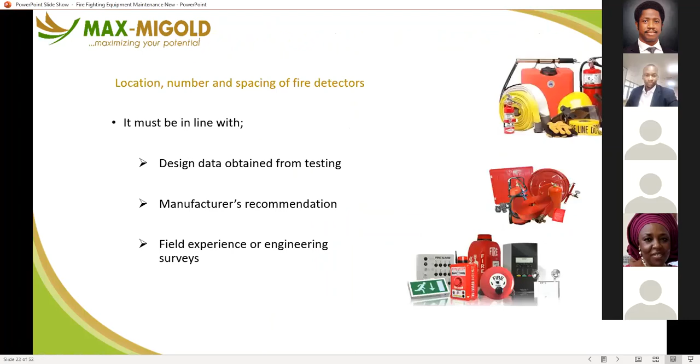And it could be passive, or can I expand this slide and see? No, you're going too fast. What's happening? Go to the very first slide. Let me. All right, so the very first slide. Yes, please. I was laying background, you don't worry. I'm just laying background for the past 10 minutes. Okay, yeah, is it all right? Just stop here. Yes, okay.

It's right there. So I want to lay emphasis around the passive and active. The fire system can be passive and can be active. By the word passive, we mean that we need somebody to actually go in there and activate it, for instance, our fire extinguisher.

Have you seen instances where the fire extinguisher even got burnt? Yes, because it is actually a passive system. It's a system, so when I say passive, something is waiting to be activated. It's a system that cannot operate itself, it needs help. It's handicapped, yeah, so it's disabled. So okay, don't let me use the word disabled, that will not sound right. So it's a system that needs someone, a human being, to actually go in there and activate it.

Whereas the active system is a system that senses the presence of either smoke, fire, or abnormal heat condition, and then discharges to work. Next slide, please.

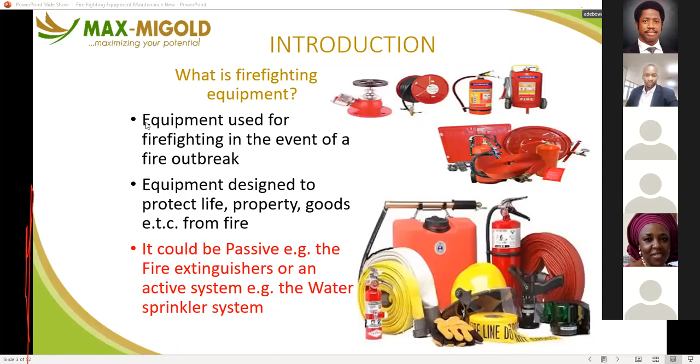Am I audible? Next slide, Lamide. Yes sir, or Baraka, next slide please. It doesn't move here, is it my network? Yes, I think it's the network, sir. Okay, yes, okay, just tell me the header. All right, okay, okay, I've seen it. Yeah, okay, the basic principles of fire.

So this is fire prevention. Let me patiently take this page. For fire to start, 3 things must come together, and that's what we call the fire triangle. 3 things must come together. The first thing is that there must be presence of fuel.

Fuel must be in a combustible state. I use the word combustible state, or should I use the word vapor, in a vaporized state? Fuel is everywhere, but it has to be in a state where it is ready to go off before it can then lead to fire.

Everything that burns does so in vapor state, even though we have three main states for fuel. So why am I using the word states? Don't let me confuse us. Okay, so there are 3 forms, let me use the word form. So there are 3 forms by which a fuel can actually exist.

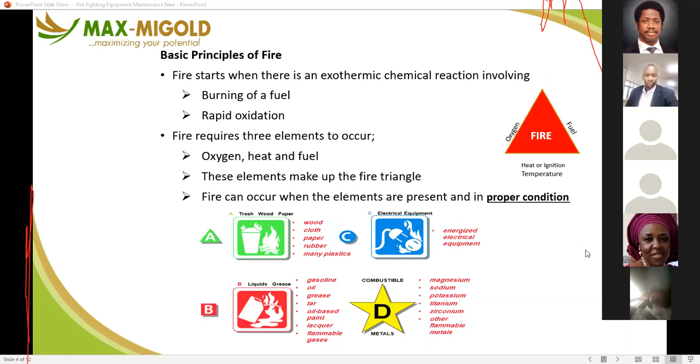Next slide, I want to talk about this ABCD right now. Next slide. Next slide, please. Are we together? Yes. How about this? Okay sorry, I was muted. Okay, so this is just to further buttress what I've said.

That oxygen needs to be between 15 to 21% for us to have that ignition. The ignition temperature of the material must be reached before it can ignite. Possible sources could be naked flame, like the cigarettes I was talking about, or heating elements like our microwave, our electric oven, and stuff like that that we might actually have, especially in residential facilities.

Defective electrical wiring is very key, this is actually one of the main causes, when people try to manage what they have or engage incompetent electrical technicians to work, and that could be an issue for them. Next slide please, so we're talking about fire prevention. Next slide.

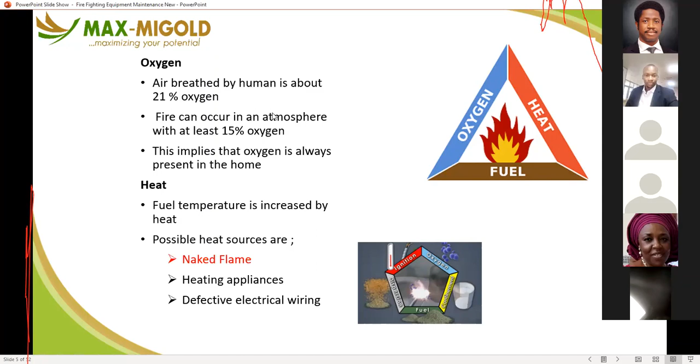Yes, please. Okay. And the next slide is talking about the fuel that could be in liquid, gaseous, or solid states. I think I've mentioned that. And that it could be anything from our clothing, furniture, and what have you. So a good understanding of how fire starts will give you an edge in preventing or fighting the fire. Oxygen sustains combustion. Heat raises the temperature of the material to its ignition temperature. And some sort of combustible material, or fuel, which can then lead to a chemical reaction.

So fire is an exothermic chemical reaction. Exo meaning outside. Thermic means heat. Reaction means more than one thing, and the two or more things need to come together. So when you say fire is exothermic, that means it's a reaction that involves giving off heat and light. So when there is fire, you will see heat, it will be hot. You will see light in form of flame.

And most times, because the oxygen available may not be able to balance that equation, you then have what we call incomplete combustion. And that's why we have smoke being given off. When you don't have sufficient oxygen, what you then have is smoke, that's CO, carbon monoxide, being given off. So fire has those attributes. Fire will give off light, heat, so it can burn.

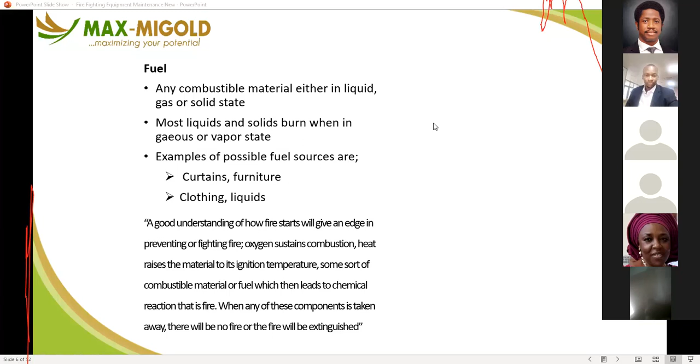Next slide, please. I'm sorry, I'll find a way of maybe logging on to my system the next time so that I can change this slide myself. I've been jumping from meetings to meetings since morning. No problem, sir. No problem. Okay.

So what do we need to do? We need to detect fire and respond to it by ensuring that our building is equipped with what? Smoke detectors and suppression systems. Train our workers so they know what to do in case of emergency. And we assign roles to all staff. We also need to have what we call a building layout or facility layout so that even outsiders like firefighters that have come to our site can find their way around the building without even speaking to anyone. Next slide.

As an FM, your role is strategic. When I say FM, I mean facilities manager. I don't expect you to be the person carrying a fire extinguisher up and down. Not to say you can't, but when there are emergencies, or even before emergency, that is not supposed to be your job, unless maybe you don't have people working for you. If you have people working for you, then I think you should be more strategic.

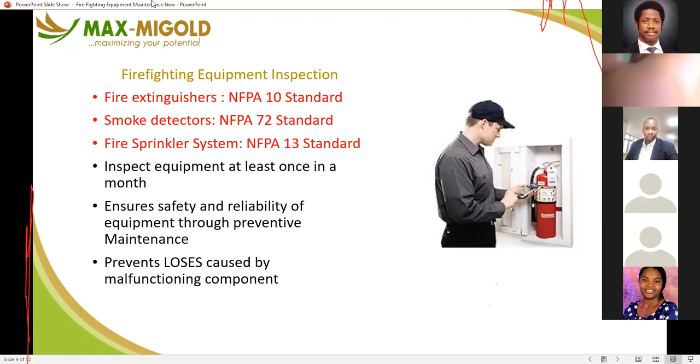I can't see the slide. I'm still seeing. Okay, so this is just a checklist for your fire extinguisher. Sorry. Yeah.

Yeah, this one. Conducting fire extinguisher inspection. So this is your checklist, the things you should look out for when you have your extinguisher. Accessibility: can you quickly get to the point where the fire extinguisher is? Pressure indicator: on the DCP, that green circular gauge, is the spindle in that gauge on green?

Then have you labeled your extinguisher so that you can easily identify its location within the premises? Does the extinguisher have pin and seal? I'll show you when we look at the body of the extinguisher. Is the service date clearly indicated? Is the horn or hose in good condition? Then the base of the cylinder bottle is not rotten, so it's actually pressurized.

The installation height: is the extinguisher not installed at a height that is too high that we can't carry? We need to look at our average height while installing this extinguisher so that we don't just install the extinguisher in a place where you can't even carry it.

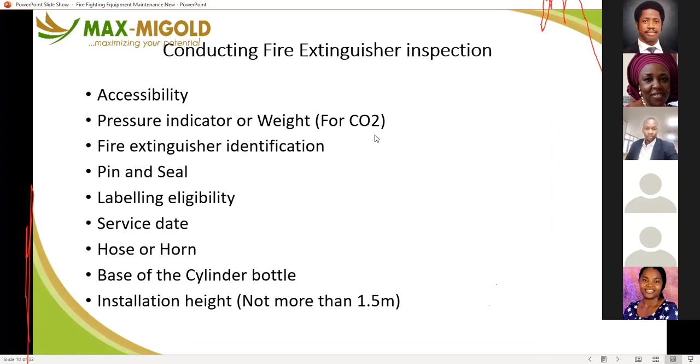So this is just an illustration. So don't go out there and say Okalapo told you you should not service the extinguisher. I didn't tell you that. But you should inspect your extinguisher every month. Have a checklist. Those 9 things in the previous slide, just put them in a table, then answer yes or no. So turn it into a question.

Is it accessible? Is it installed at a height that is easy to use for everyone? When I say 1.5 meters, which is about 5 feet, can everybody access it? You can even do a simple sample in the form of a questionnaire in your office during your inspection: can you guys access it? Can you carry it easily? And if they say, oh no, it's too high, then you know that on your next installation you need to correct that.

So, biannually. Somebody will be asking me, why do you have to service the extinguisher every 6 months and not every year? As it is, there is no standard that says you should service the extinguisher every 6 months. But when there is no standard, we usually copy what is being done in oil and gas. So in the Mineral Oil and Gas Safety Regulation 1997, released by the DPR, Department of Petroleum Resources, where you don't have specific service dates for equipment, service them every 6 months, then you are safe.

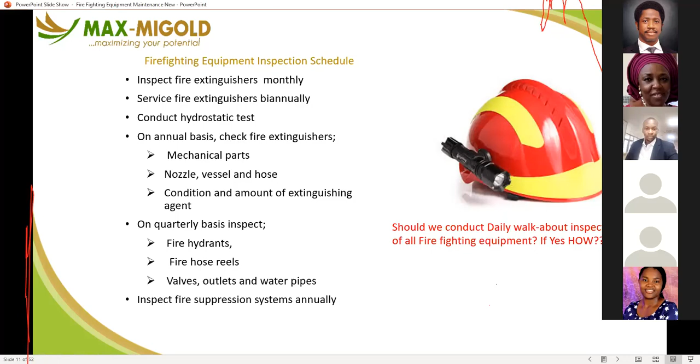Okay. So these are some existing standards, what we call the legal requirements. There is the National Fire Safety Code 2013, signed by the Minister of Interior at that time. All right.

That's what we call the RRFSO 2005 in the UK, which is the Regulatory Reform (Fire Safety) Order. The law that needs to be complied with in the UK, not just England, but also Scotland, Ireland, and what have you. So that's very key. Then in the US, they also have what's called the Occupational Safety and Health Administration, OSHA. I'm not saying OSHA Academy, you didn't hear academy from my mouth, OSHA. So that's OSHA.gov. So you can check all those standards there.

Next slide, please. I can't see the slide again. What was that phone? Okay, I've seen it. Next slide, please. So we have 5 minutes to go on, please.

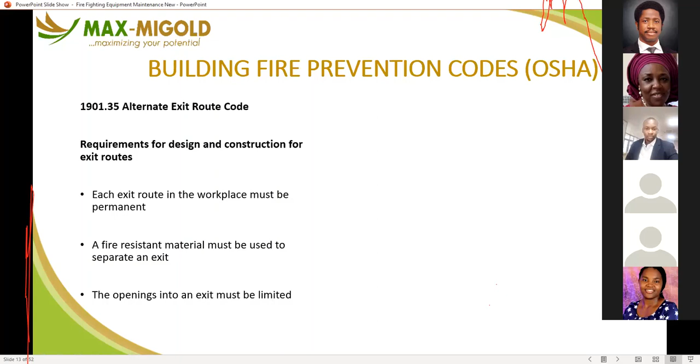So start asking yourself. I know somebody said she wants to learn what other things you need to put in place in our organization. Ask yourself, do we have exit routes? Yes. Where does this exit route lead to? If it leads back to the building, you don't have an exit route. I'm sorry. It should lead you out of the building. Do we have signages around that place to show? Please, next slide. Do you have signages to show?

The door on the emergency exit, does it open outside? The door must open outside. So some people actually have maybe two swinging doors. Because it's easier for you to push the door than to pull the door if there are people scrambling to get out of the building. It's easy to just push the door and everybody goes out. The access way must not be blocked. It has to be free of obstacles. You understand that? It has to be free of obstacles.

Then I don't expect us to have things like office desks there, because most places where I go to, that's where you keep the cleaners, right? God will judge us. So the cleaners always sit around the fire exit routes. We can't afford to have a small room for them to sit. The cleaners and drivers just hang around within the facility, which is not fine. Please, we need to find a way. I know there's space constraint, but we just need to find a way around that.

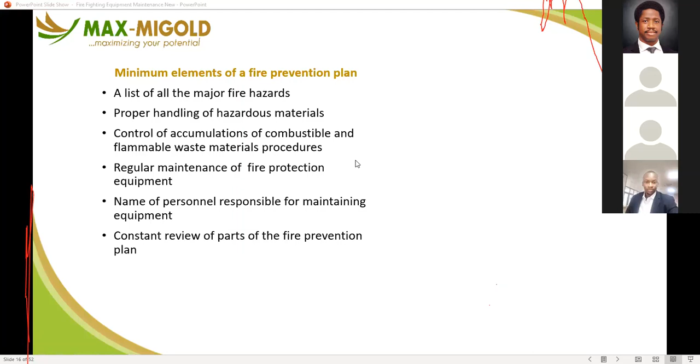Okay, so your fire detection system, which is the smoke detector, like I said, please just engage competent people, and they're going to install this in compliance with installation standards. Please don't try and do this yourself, unless you're just installing for a shop or for a kiosk. Or if it is for a facility, please get the competent people to do the fire detection system installation for you. Next.

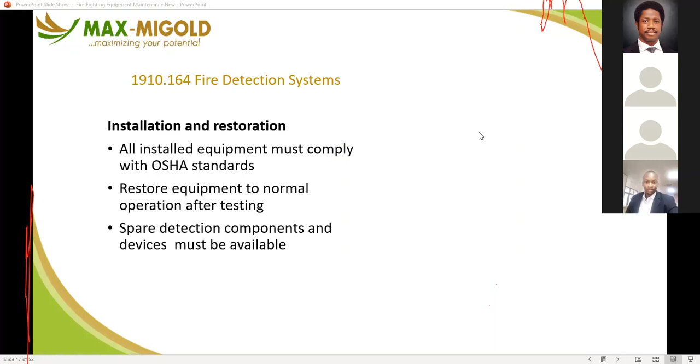Testing and maintenance. If you have a maintenance team in-house, great. They should be able to, to a large extent, help with the testing of your equipment, your fire equipment. So the internal ability to test is very key. So please get competent people that can carry out those tests internally, and ensure they are trained to do so.

And your detector system should be cleaned as part of your maintenance system. So the smoke detector should be cleaned of dust and other particles, just for you to ensure that they won't give you the false alarm and they are in good working condition. Of course, some use batteries, so we need to check that the batteries also, your 12-volt batteries, are replaced every 6 months during service or as need arises. Next slide, please.

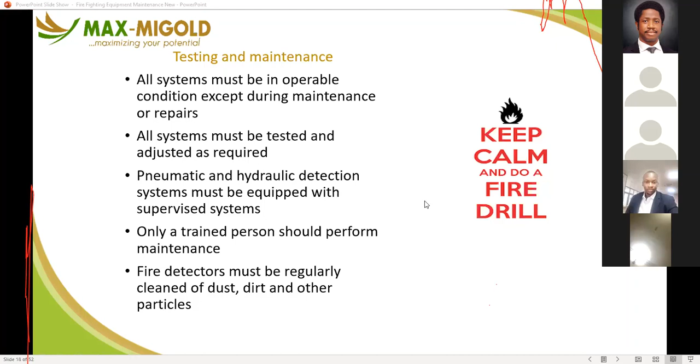Fire detectors protection. So most times these detectors are even made of non-corrosive materials, so plastic and what have you. But we're saying that you should ensure that your fire detection system is protected from corrosion or physical impacts that could damage it.

And the detector system, while they are being installed, they need to ensure that they're installed independent of their tubings or wire. That means they need to be screwed to your ceiling board or nailed to the wall or something. Your installation has to be done correctly, and you should not hang the smoke detectors by their wires or tubings. Next slide.

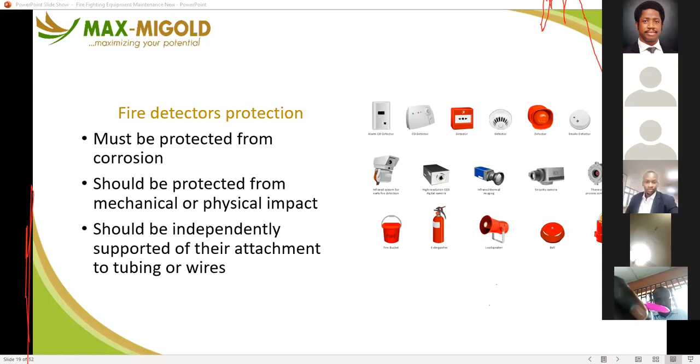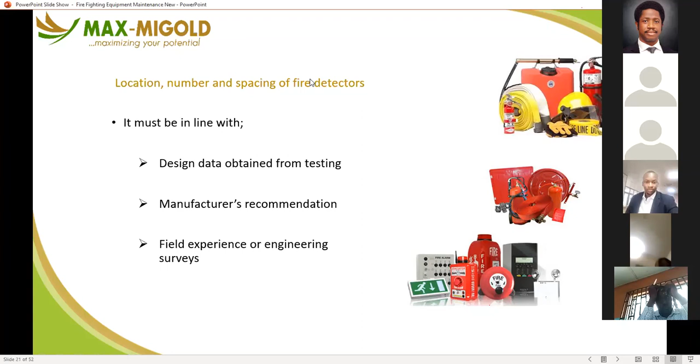So it's still talking about the design of the automatic sprinkler system, which is NFPA 13. I would say you should refer to NFPA 13. In fact, you don't need to bother yourself, just ensure that a competent company is given this job, and you can rest assured that they will design to suit the purpose. So this slide is just telling us what we need to watch out for, but it doesn't mean we have to do all this. It's not in your area of specialization, so give the job to who can do it and look out for all this when the job is being executed. Next slide.

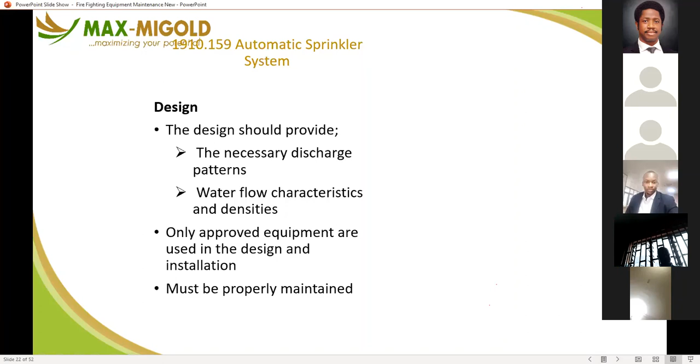So acceptance test, a proper acceptance test should be conducted, and this also should be conducted by competent people. So hydrostatic tests for the pipe, to ensure that the pipe can withstand the pressure coming from the pump. You flush the underground connections, you test the drain facility, you operate the valves, ensure they can open and they are still serviceable and maintainable. So you need to carry out these tests from time to time, for you to even accept. So at the point of accepting the installation, you need to carry out this test. Then while in use, doing inspection, you also need to test this from time to time, depending on your facility.

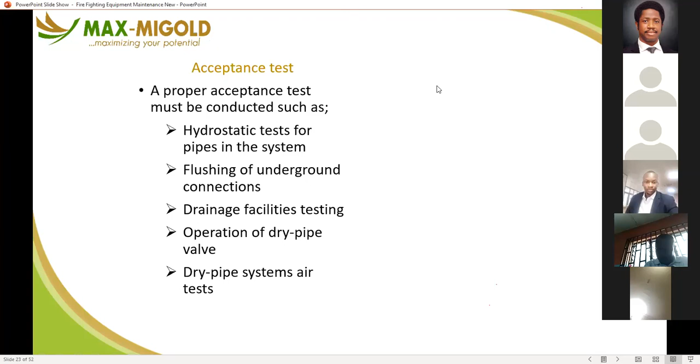Okay, so this is just talking about the water sprinkler system. So this is how it looks, these are what the sprinkler heads look like. So like I said, NFPA 13 will help you with the design. This spacing is not cast in stone, it depends on the type of facility, use of the facility. So when I say type of facility, is it a multi-story building? Is it a multiple-use building? What kind of structure is the building? Then what are they doing in the building, which is the use of the facility? Are they working with chemicals? Are they storing things on shelves? So the design will differ based on what is being done. So please, like we say for occupational health, don't self-medicate, don't self-treat. Just reach out and you'll be sure that you get results.

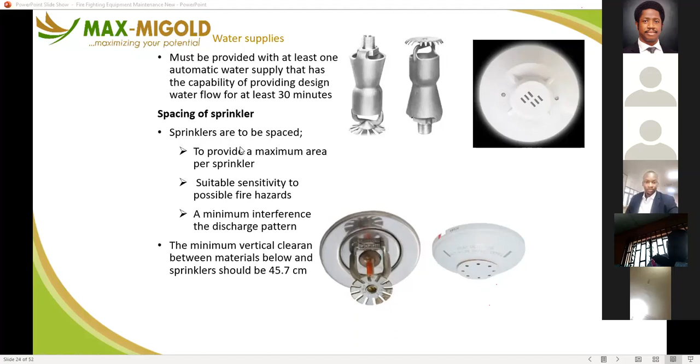The next slide, sir. Next slide, please.

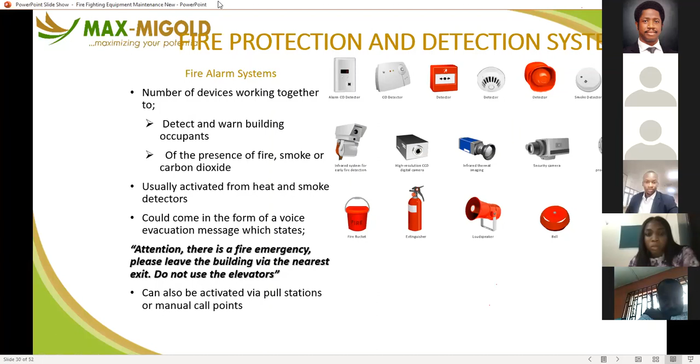Next slide. So we said detection is the function of a fire alarm system, of course the sound to inform the occupants. Then, with proper coordination, you can inform the fire service department. If you have a fire service department in your company, good, that's for your firefighting. But if you don't, call 767 or 112 if you're in Lagos - these are the best numbers to have.

Depending on what the design is, if you are using a magnetic fire door, the alarm will release the door so that people can go out through the exit. Also, heat and smoke detectors - when there is an alarm, they all go off just to make sure that people are alarmed or notified and they leave the building as soon as possible.

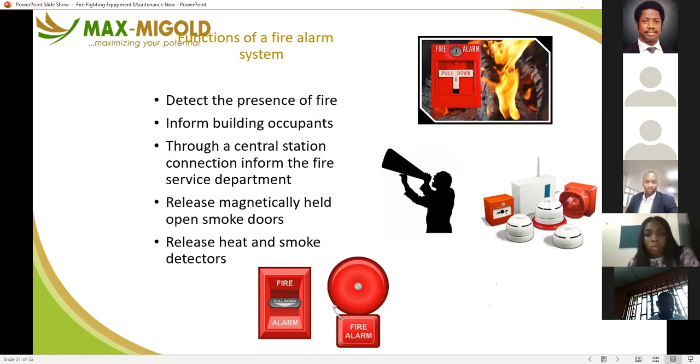Next slide. The alarm system can be addressable. Addressable means it can communicate where the fire is, where the fire incident has started from, and then everybody can evacuate. The incident commander can also address people from the control room, and everybody will be notified and can act and move.

But the analog system, most times, is the one we have that we need to operate manually. So there is the addressable system that you can use to notify everyone on different floors that fire has happened on a particular floor, and you can even control how they evacuate from a building.

There's something we call PEEPs and GEEPs. PEEP is personal emergency evacuation procedure, used in a place where we have people with physical challenges that need to be accommodated - people with impairments, maybe eyes or legs, which could lead to slow reaction during evacuation. So we have a buddy system where someone will assist those kind of people.

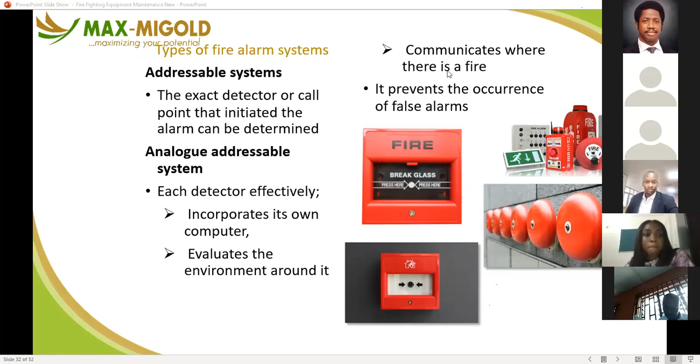Next slide. We've got wireless systems, conventional systems, all that. Most of us, I know, have the conventional system where we do a lot of wiring from the smoke detector to the alarm panel, and we've got the sounder and all those things. They are fine.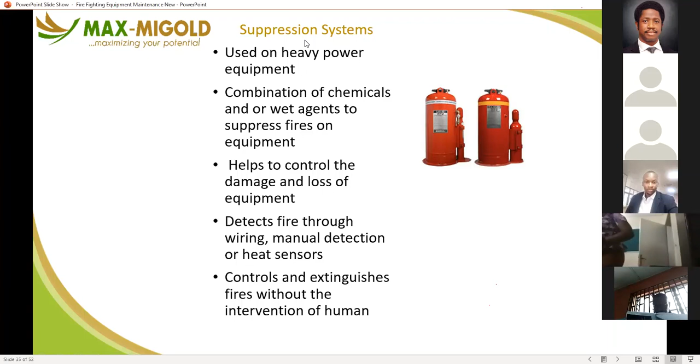Okay, I think we've spoken about fire extinguishers, but I think it's good we talk about it here again. So if the fire is at the incipient stage, meaning the fire is small—if it's a grown fire, you can't use a fire extinguisher, it won't work. But if the fire is at the incipient stage, or just starting, then the fire extinguisher is effective.

It's not supposed to be used when you don't have control over the fire, or when the fire has gone out of hand. So for a fire that has reached the ceiling, don't use a fire extinguisher. For a fire event that you attend to such that your own escape route is blocked, please don't attend to that kind of fire. Or when you judge that this fire needs the attention of the fire service, please don't jump in there and say you want to act as a Superman. It's not going to work. Please just leave that fire to burn.

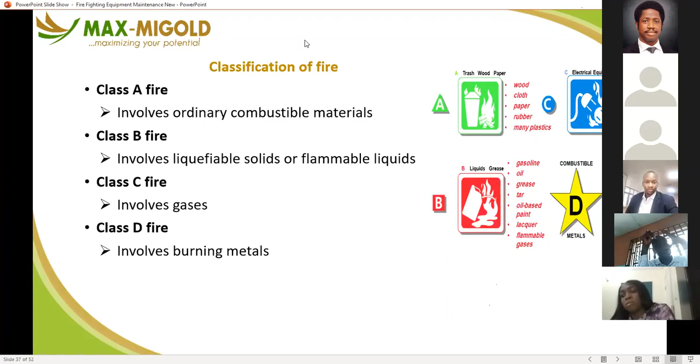Next slide. So NFPA 10 covers this. Okay. So there are 5 classes of fire. We have the class A fire, which involves ordinary combustible materials in solid states. We have class B fire, which involves a liquefiable solid or flammable liquid. We have class C fire, which involves combustible gases. We have class D fire, which involves burning metals. And we have class F fire, which involves animal fats. Next slide. You can write that.

If it's black, then it's a CO2 cylinder. But CO2 also has a horn as against a hose. If it is DCP, it will be blue. If it is a water extinguisher, it will blend with the color of the cylinder, which is red. If it's chemical foam, it's cream. And if it is wet chemical, it's yellow. So the dry chemical powder, or DCP, is a multi-purpose extinguisher that can work on ABC: solid, liquid, or gas. If the fire is started by electrical equipment, it can also work, but it will leave a stain, because the content is powdery and there's residue.

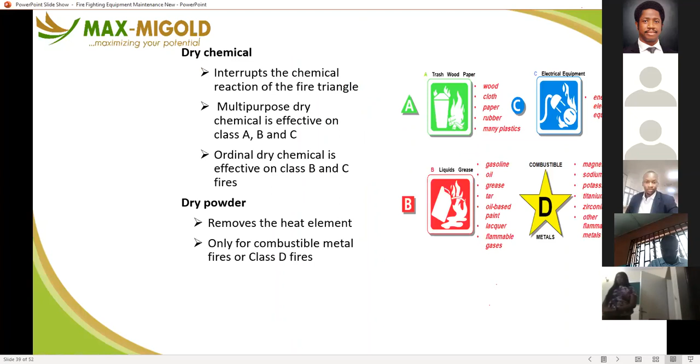Sorry, next. Next, please. Next, I've spoken about all this. Next.

Okay. The hose reel, you have seen the hose reel, and you've got the hydrant standing here. So please, if you use a hose reel in your facility, maybe because of a fire truck or you have a water pump, please ensure that the hose reel is returned to its place. The hose reel must be in good condition. They are mostly within the premises and within the building. While your fire hydrant with the gate valve, you also need to test every time.

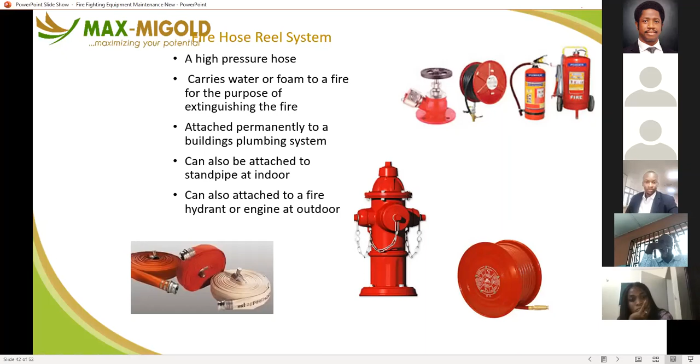So a hose reel is a high pressure hose that carries water or foam to the fire to extinguish it. It is attached to the plumbing system and can be connected to a standpipe that will be attached to a hydrant. Next, please. So take care of the hose reel. Make sure it's not leaking because they're just rubber hoses.

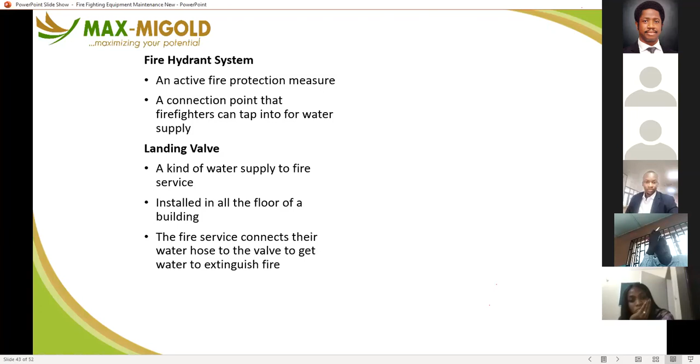So in case of fire, what do you do? Raise the alarm by shouting fire, fire, fire, or press the call points. So an alarm should be raised by any person. So you need to show them how to raise the alarm by breaking the glass. Then, as much as you have evenly distributed your extinguishers, they can use the right one to extinguish.

So if you can do so, it is best to switch off your power source. Maybe switch off the generator or something, so that you don't have power supplied at that point.

Okay, next slide, please. Next slide. Next slide, sir. Yes, please. Okay, this is it.

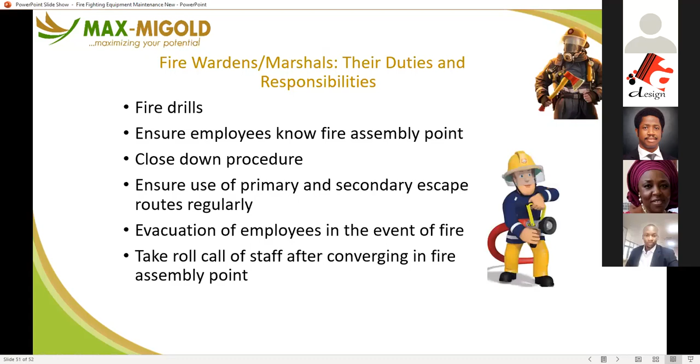In the offices, yes, you have both the CO2 and DCP outdoor. In the kitchen, I would just advise you have the CO2 and the fire blanket. So if there is fire in the pot, maybe due to overheated oil, just use the blanket to cover it. Then switch off the gas. Don't pour water. Never pour water on hot oil. If you do, it's going to result in an emergency.

Almost 99% of the time. Critical situation that needed to be considered. So in the process of carrying out the fire drill, you bring people together, then they have to congregate at the muster points. So the concern is about balancing the two, because when we're looking at these emergency cases, we also look at other considerations of health, safety, and other things. So I want to ask if it is a good reason, because presently we put fire drill on suspension.

You can do what we call a phased evacuation. The fire itself has not gone on hold because of COVID-19. We're still having fire outbreaks here and there. So a phased evacuation means that if you have, say, a 4-story building, because of the population, you can have a fire drill and say we are evacuating floor 1 and 2. You understand? And you achieve the same results.